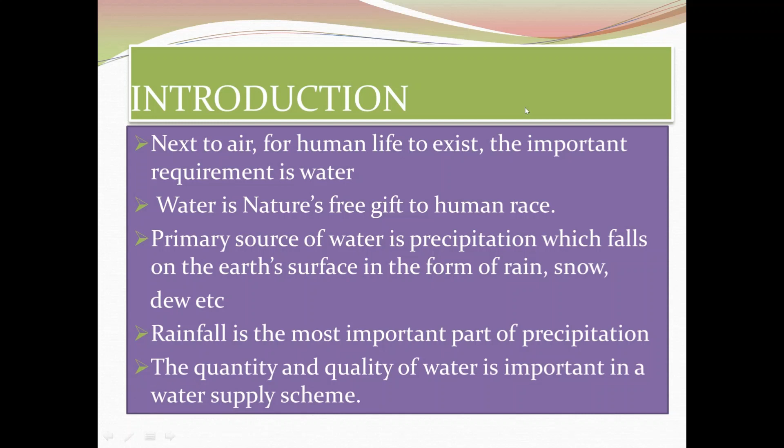Primary source of water is precipitation, which falls on the earth's surface in the form of rain, snow, dew, etc. Rainfall is the most important part of precipitation. The quantity and quality of water is important in a water supply scheme. Now we'll see the sources for water supply.

There are surface sources and subsurface sources or underground sources. The main surface sources are lakes and streams, rivers, ponds, and storage reservoirs. Lakes and streams. A natural lake represents a large body of water within land with impervious bed. Hence, it may be used as a source of water supply scheme for nearby localities.

The quantity of runoff that goes to the lake should be accurately determined, and it should be seen that it is at least equal to the expected demand of locality. Similar is the case with the streams which are formed by the surface runoff. And it is found that the flow of water in stream is quite ample in rainy season, but it becomes less and less in hot season, and sometimes the stream may even become absolutely dry.

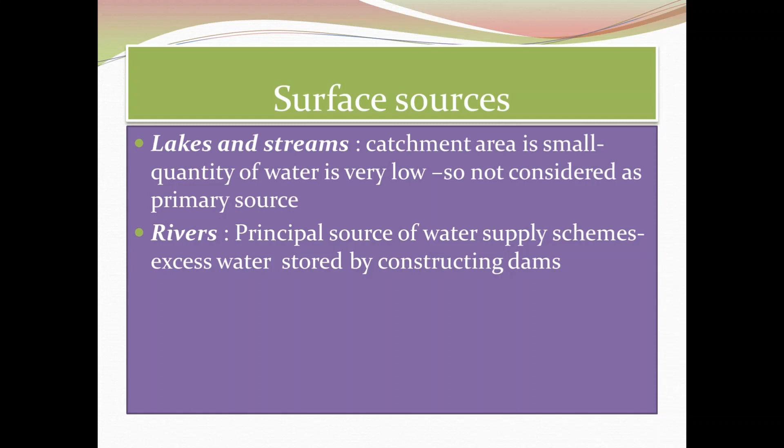Next, rivers. The large rivers constitute the principal source of water supply scheme of many cities. Some rivers are perennial while others are non-perennial. The former rivers are snow-fed, and hence the water flows in such a river in all the seasons. The second type of rivers dries in summer, either wholly or partly, and in monsoon the heavy floods visit them.

Ponds. It is a man-made body of standing water smaller than a lake. Thus the ponds are formed due to excessive digging of ground for the construction of roads, houses, etc., and they are filled up with water in the rainy season. The quantity of water in pond is very small and it contains many impurities. So a pond cannot be adopted as a source of water supply, and its water can only be used for washing of clothes or for animals, etc.

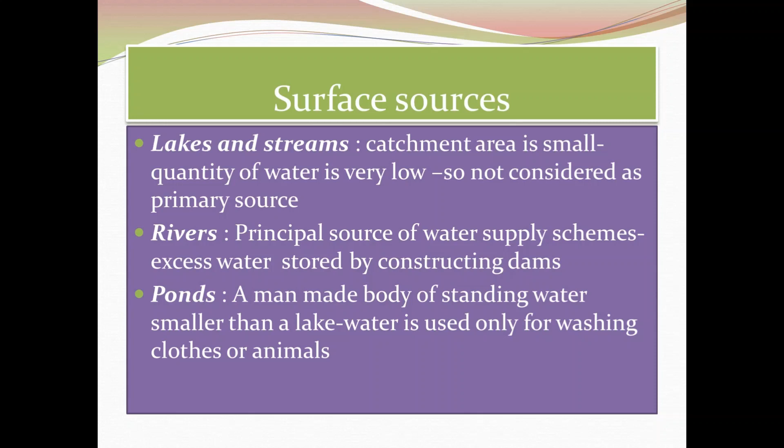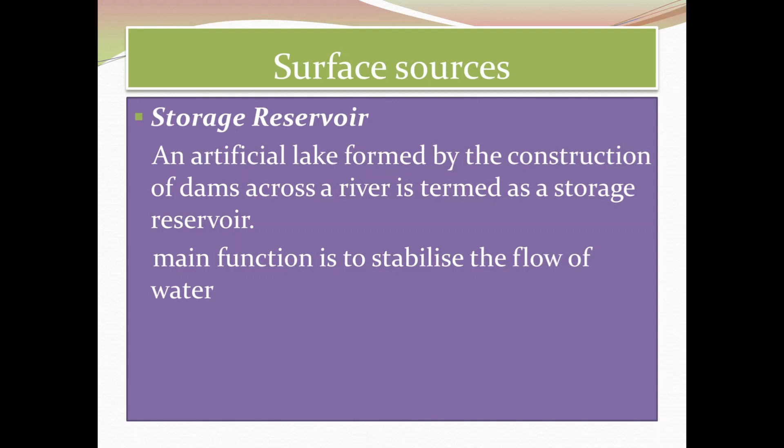Next is storage reservoir. It is an artificial lake formed by the construction of dam across a river. Whatever may be the size or use of reservoir, the main object or function of reservoir is to store water, and thus it stabilizes the flow of water. So it consists of essentially three parts: a dam to hold water, spillway to allow excess water, and gate chamber to regulate the flow of water.

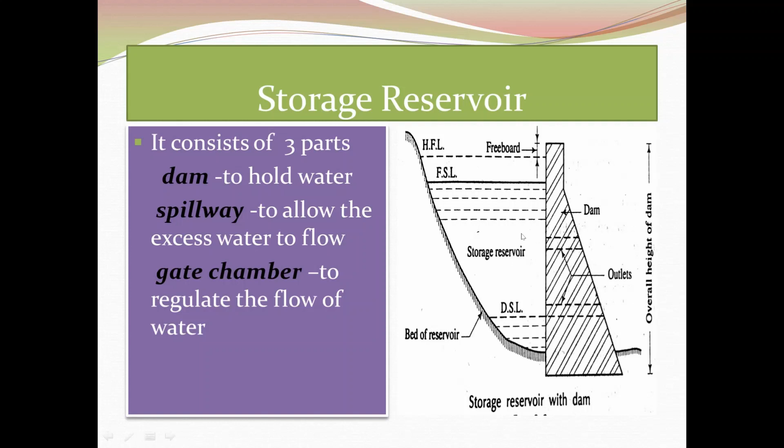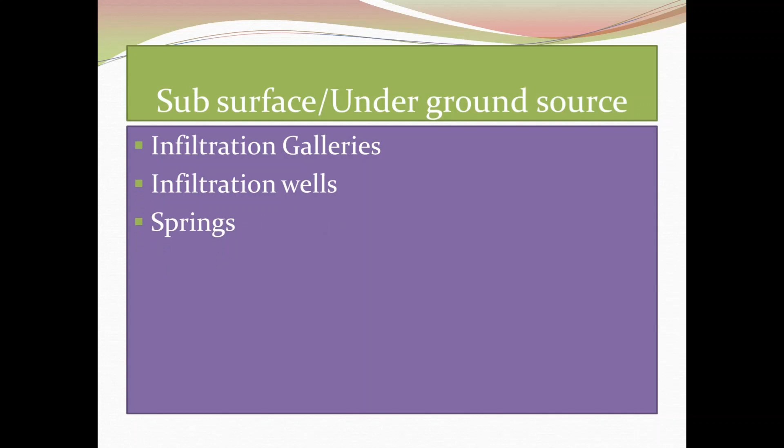Now we'll see the subsurface or underground sources. In this type of source, the water that has percolated into the ground is brought on the surface. They are infiltration gallery, infiltration wells, springs, and wells. Infiltration gallery. It is a horizontal or nearly horizontal tunnel which is constructed through the water bearing strata. It is sometimes referred to as the horizontal well.

The gallery is laid at a slope and the water collected in the gallery is led to a sump from where it is pumped and supplied to consumers after proper treatment. The manholes are provided along the infiltration gallery for the purpose of cleaning and inspection.

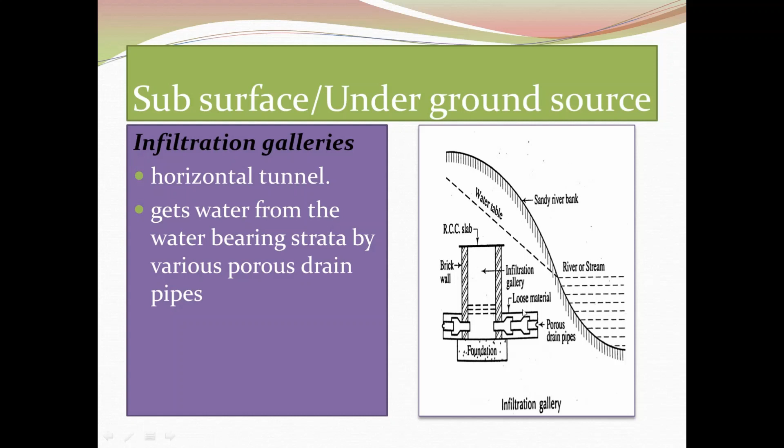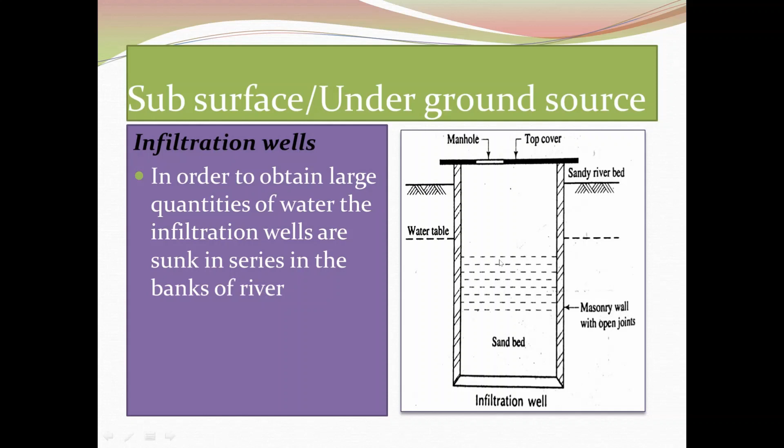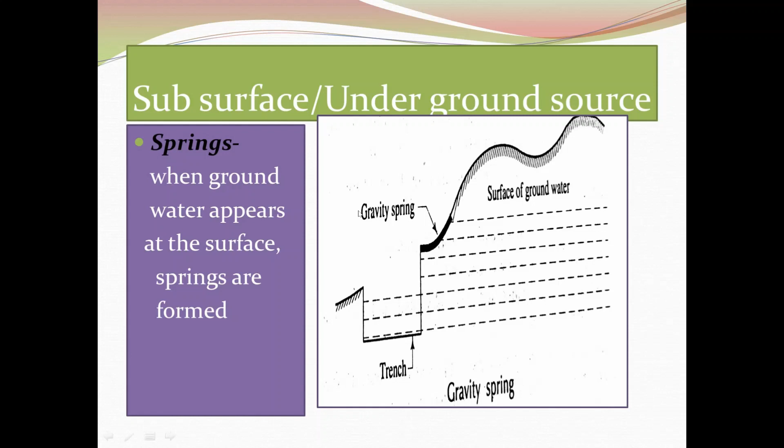Next is spring. When groundwater appears at the surface for any reasons, the springs are formed. They serve as source of water supply for small towns, especially near hills or base of hills. There are different types of springs. A commonly appearing one is the gravity spring.

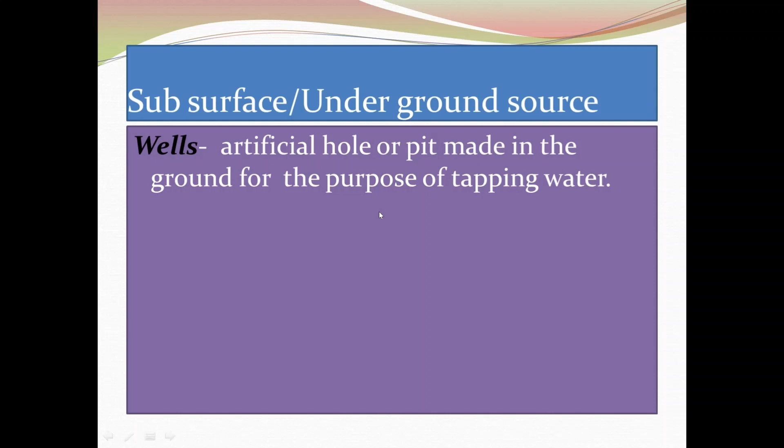Next is well. A well is defined as an artificial hole or pit made in the ground for the purpose of tapping water. In India, the chief source of water supply for most of its population is well, and it is estimated that about 75 to 85% of Indian population depends on well for its water supply. The main factors that influence the quantity of water are geological condition, porosity of various layers, and quantity of water which is absorbed and stored in different layers.

Now we'll see the water supply system. The primary objective of water treatment for public supply is to take water from the best available source and to subject it to processing which will ensure water of good physical quality, free from unpleasant taste or odor and containing nothing which might be detrimental to health. The treatment of water to improve its quality involves addition to, subtraction from, or chemical changes in the raw water.

And next is the transmission works. In many cases, the collection works may be far away from the city where water is to be supplied. In that case, water is conveyed to the city through transmission work. These form the connecting link between the collection work and the purification works. Depending upon the topography of the area between the two sites, the transmission work may be in the form of a conduit, canals, or aqueduct, etc.

Then the next is the purification works. The water collected directly from the source may not be safe for drinking because of its physical, chemical, and biological impurities. The municipal water works must deliver to the consumer the water that is hygienically safe, aesthetically attractive, palatable, and economically satisfactory for its intended use. So there are different methods for the purification like filtration, disinfection, softening, etc.